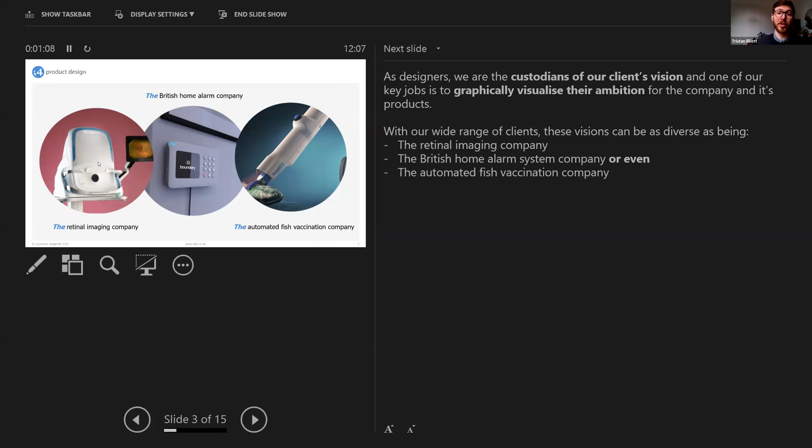One of the more bizarre examples of a customer's vision from a few years ago was to develop the world's first electrical stimulation device for weight loss. The company was a startup with two founders, a neuroscientist and a neurosurgeon, who had not previously developed a product before.

We became their turnkey development partner, and along with their preferred contract electronics manufacturer and our proposed injection molder, we were relied upon to give them the kind of costings that they would need for fundraising, which was quite a mixture of government, VC, private investment, and crowdfunding.

My reason for raising this particular example is because it epitomizes the competing interests that can sometimes be at play, such as ergonomic challenges, and for this product it was a one-size-fits-all headband. There was also the need to have a high-quality aesthetic, which points to really having a compact electronics design, and keeping both the project costs and the unit costs as low as possible, as this was a consumer electronics device in a competitive space.

Whether or not you opt to use your own in-house development team, if you have one, or those of an outsourced partner, without ensuring close integration of the design and engineering functions, you could find yourself in a situation where you have a design that is highly functional, simple enough to fabricate, but not really desirable. Or even worse, possibly the design is really desirable, but costly or perhaps impossible to manufacture.

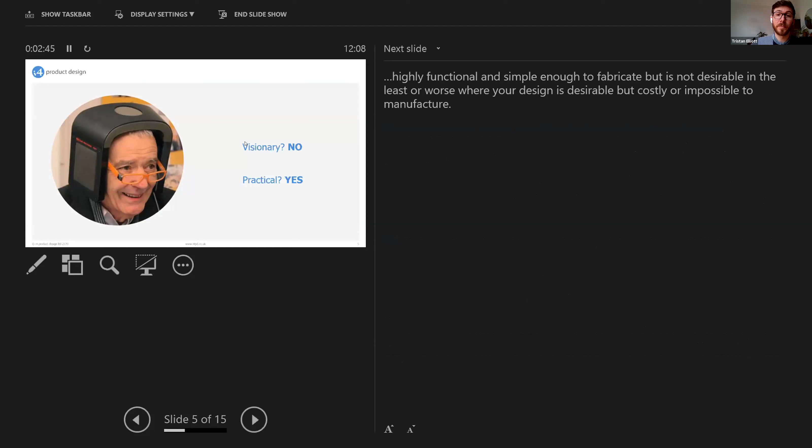Using an integrated and experienced design team, armed with your commercial targets and market insights, can deliver creative designs that you can be confident are rooted in the realms of practicality. This is what I like to call creative pragmatism.

Two of the key questions that we asked this client and every other client before setting off on the road to design for manufacture, or even starting the project, were: what is the development budget?

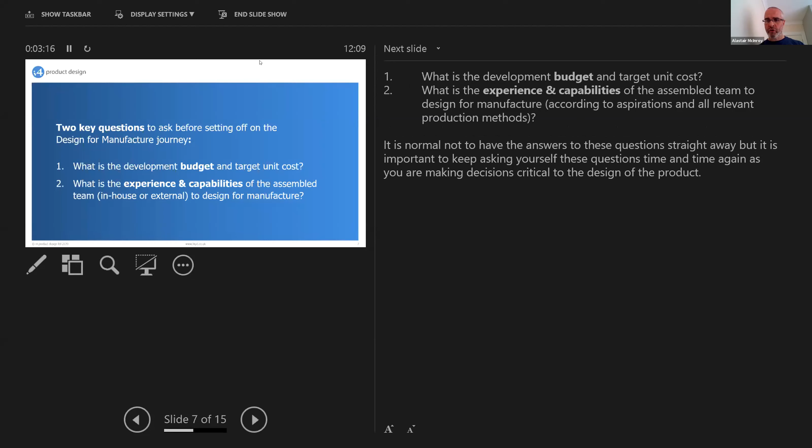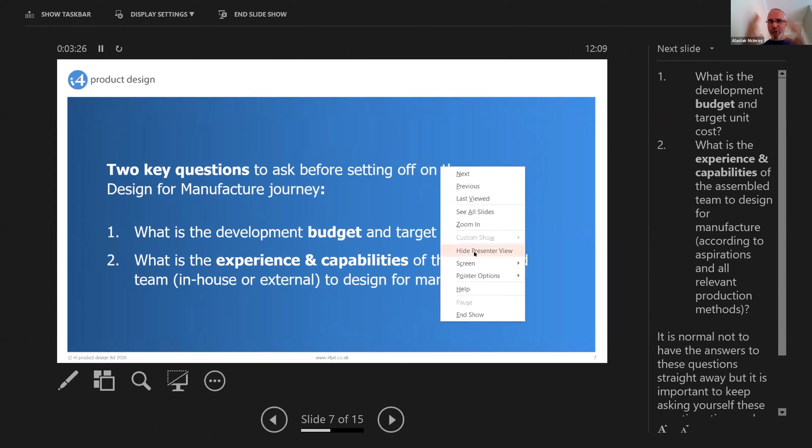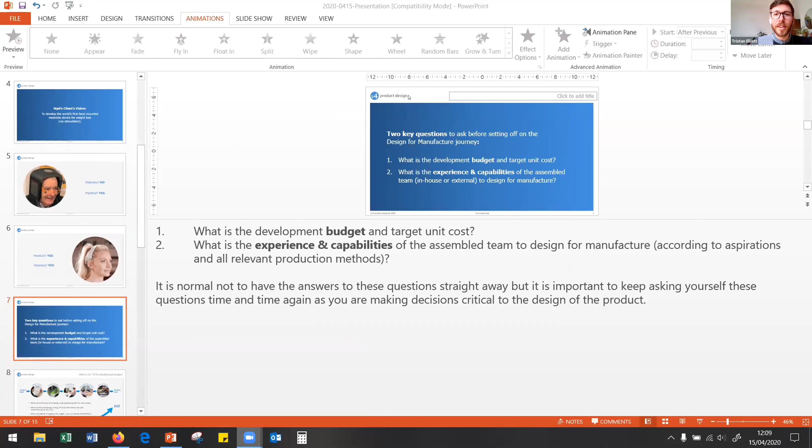Hi Tristan, sorry for the intrusion, but I am seeing your slides in edit mode. Are you? Yes. Okay, I think from the chat others may be seeing that as well, so we get the full splendor of your slideshow. Okay, no problem, let me see if I can rejig this for you all. Believe it or not, this was actually tested. Okay, how about that now? Good, perfect, sorry about that.

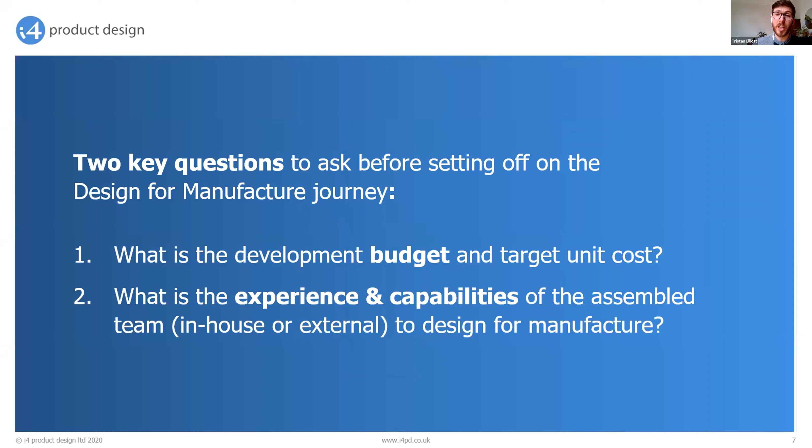So the two questions are: what is the development budget and target unit cost, and what is the experience and capabilities of the assembled team to design for manufacture according to aspirations and all the relevant production methods? It is not really normal to have the answers to all these questions straight away, but it is important to keep asking these questions time and time again as you make critical decisions for the design of the product.

At the top of the slide is the list of core phases a product will pass through from its birth to manufacture. It's crucial to be honest with yourself as to the true cost of development and budget accordingly, or you risk what I call zombifying your project.

This is where you've spent all your funds reaching the engineering phase, but your initial investment can't cover the cost of producing production tools, let alone your first minimum production quantity order. So prepare your cash flow projections accordingly and push for favorable payment terms from your partners, such as small upfront payments for each phase of design work, with the remainder payable on deliverables, once you're 100% happy with the quality and can sign off on it.

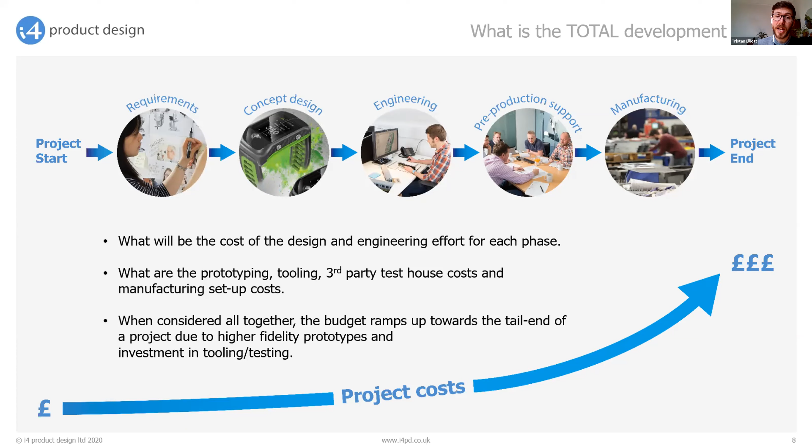Project costs do ramp up towards manufacture, as you begin to produce higher quality, higher fidelity prototypes, start to pay for third-party test house fees, and more often than not have to fork out 50% deposits for any tooling. It's also important to account for import duties when procuring prototypes or tools from overseas vendors, as this can be an unexpected addition of 20% to your costs.

If you're working with a design partner or manufacturer, make sure you're getting a quote that covers you from where you are on your journey through to gold standard production samples. Ensure they've included physical prototyping as an activity within the concept and detailed engineering phases, and make sure you know how much contingency is included in both the budget and timeline to account for iterations and learnings from these prototypes.

When briefing the consultancy, make sure you're clear on what you expect from them. For example, who is to produce the assembly drawings? Who is to undertake design refinements during production sampling? And who is to produce test jigs that may be required? Unless otherwise agreed, this is generally not something manufacturers throw in for free, and is a cost you'll have to bear, or the design consultants should quote for if you're not doing it yourself.

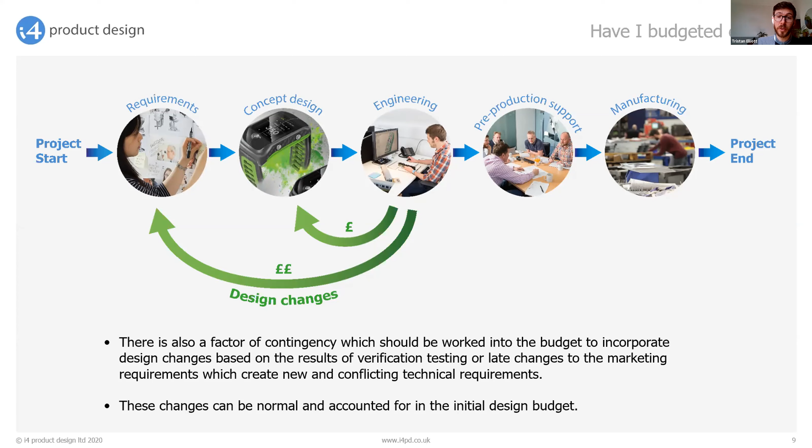One cost that you shouldn't have to factor in is large-scale design changes after an engineering phase, which is where your design should be technically frozen.

The main reason for a design change just prior to or after design freeze is due to inexperience, which can be compounded by not having internal reviews or not carrying out reviews with the contract manufacturer you've selected. This can happen as early as when you have some kind of design drawings or spec to show them.

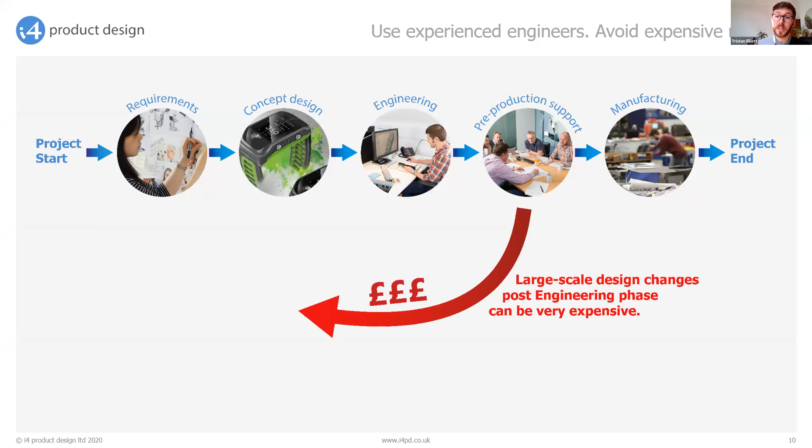It's rare to recover from these kinds of changes, as usually it means you incur the cost of redoing part or all of the engineering work entirely, and potentially scrapping an expensive production tool.

One of the most important pieces of information a designer can be fed is the target cost for a product—manufactured, assembled, boxed, and shipped. It's important to include all those factors. A target cost allows for practical concepts to be generated around part count, materials, processes, and off-the-shelf versus custom routes. By part count, that could include a decorative trim or trying to consolidate several parts into one, possibly contributing to strength requirements or conversely.

Your target unit cost can be worked out roughly by taking what you intend to be the retail price and deducting distribution costs and your desired margin, which accounts for your own costs and your profit aspirations.

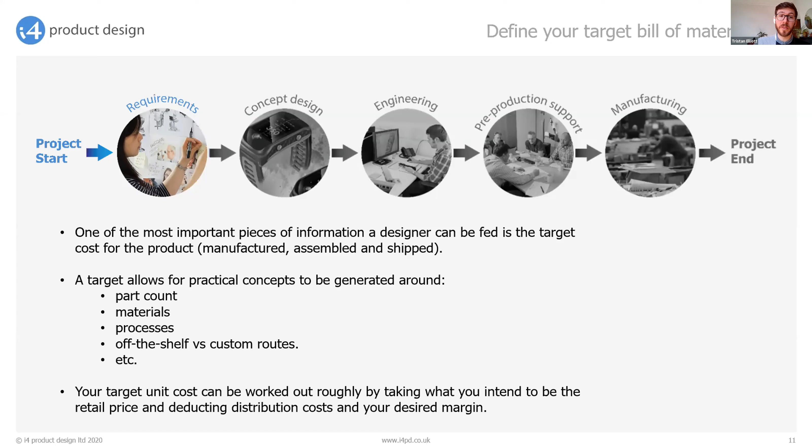It's not uncommon to use several different fabrication processes to produce the parts for one product. This means that to achieve your marketing and technical requirements, you should consider various tooling options and budgets associated with these processes and plan accordingly. It will mean your designers should be comfortable with both plastics and metal, and you'll likely have a large number of manufacturers in your supply chain, which either you or your consultants will need to manage.

At I4PD, our team have created a platform for estimating tooling and unit costs, so we can give our customers an early indication of tooling and unit cost for their NRE budget. Throughout the project, we refine this estimate as the design evolves and as we have more detailed discussions with contract manufacturers.

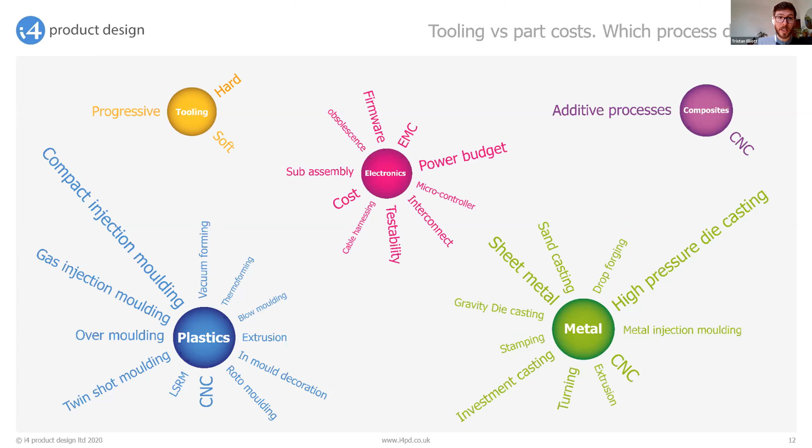It may be that there is no budget available for tooling and that all funds must be diverted into the design and engineering of either the first earliest testable product or the earliest sellable product. This could be a combination, for example, of sheet metal, which needs very little tooling investment, and additive or subtractive manufacturing, which needs none at all. The trade-off is that the unit cost will be far higher as a result of selecting these slower, lower volume manufacturing processes.

However, it could be a viable option as a means to an end, where you need to prove a concept either works or is capable of generating revenue for your investors or backers, before progressing the design to one that can actually earn you a decent margin.

High volume processes, two of which are shown here—low thousands to millions of units, like injection molding and die casting—will attract tooling costs that can ultimately result in parts that are a fraction of the cost. The same applies to electronics, where you might choose between an off-the-shelf Bluetooth low energy module or integrating your own chip solution.

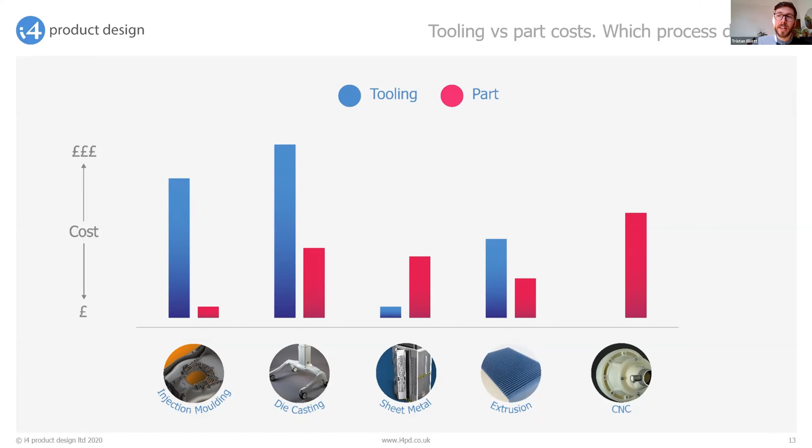You'll need to do a cost calculation to decide at what volumes it makes sense to design, test, and qualify your own solution, versus the additional cost of buying a pre-certified module. A recent study we undertook found the tipping point was around the 200,000 unit mark. These calculations should be done roughly at first, and then redone as you get better marketing projections.

So my two top tips for managing your budgets and avoiding common pitfalls: budget comprehensively for everything, including designing, prototyping, testing, tooling, and manufacturing setup costs, and include contingency—around 25% as a rule of thumb.

Build internally or partner with a team that has experience with the applicable manufacturing processes, to ensure the project runs efficiently and you avoid expensive and potentially catastrophic issues just as you thought you were nearing manufacture.

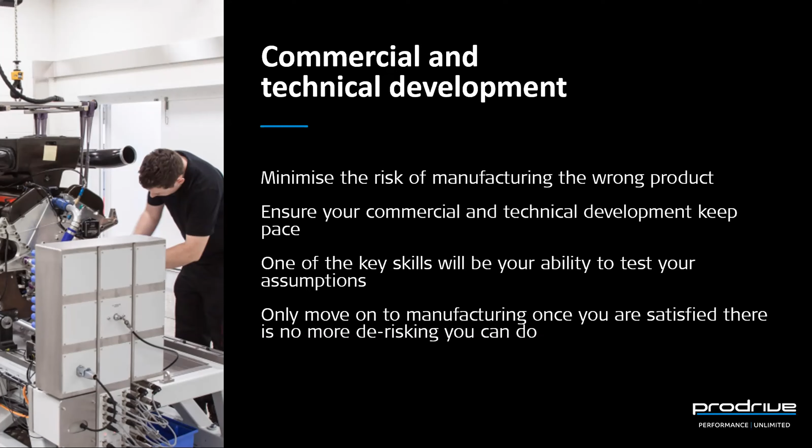One of your key skills will be your ability to test your assumptions. I'll cover some of this in the prototyping section, but prototyping is not only for technical purposes, it's very much also for testing your commercial assumptions. This testing of assumptions is key to de-risking before manufacturing. You're likely going to have to make a commitment, so do as much as you can to de-risk that point in time.

The importance of defining a scope. You might know it as a specification, but fundamentally what this does is capture the attributes and requirements of your product, based upon your understanding of the market, the target customers, and how your product will deliver value, everything you've done up until that point.

There are a couple of core reasons why you should do this exercise. It creates a level of focus to your development process, which is key. The development phase is costly, and you want to be as efficient as possible, and one way to do that is to tightly define your scope, because variance in your scope can ultimately be very costly in the long run. Secondly, it reduces the likelihood of unexpected surprises, because you're going through the whole process of thinking about all aspects of your product to reach a point where you can produce something your customers will value.

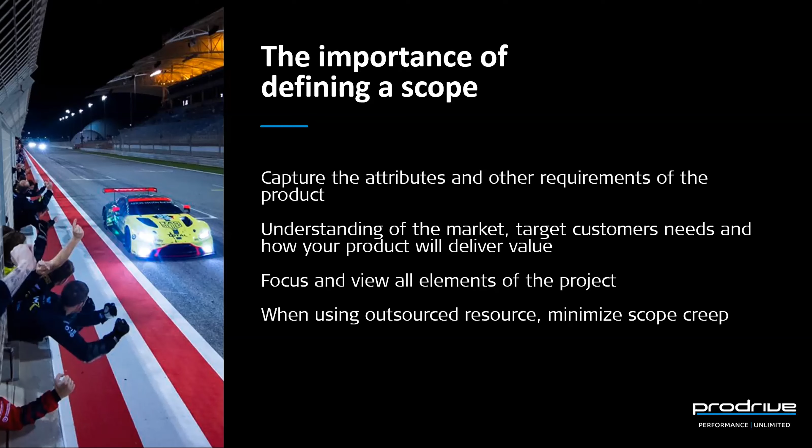Their focus was fundamentally about weight. Their product was designed for adults to use for commuting and leisure purposes, which gave them some of the parameters they were looking for. This focus allowed them to create a defined scope that they could take onto the different phases, which then defined the materials they had to use - in this case, the frame is manufactured from carbon fiber, which dictates a manufacturing process and all the knock-on supply chain effects and assembly. Without this level of scope, particularly as a startup, they wouldn't have had the opportunities without this kind of tight, laser focus on what they were targeting.

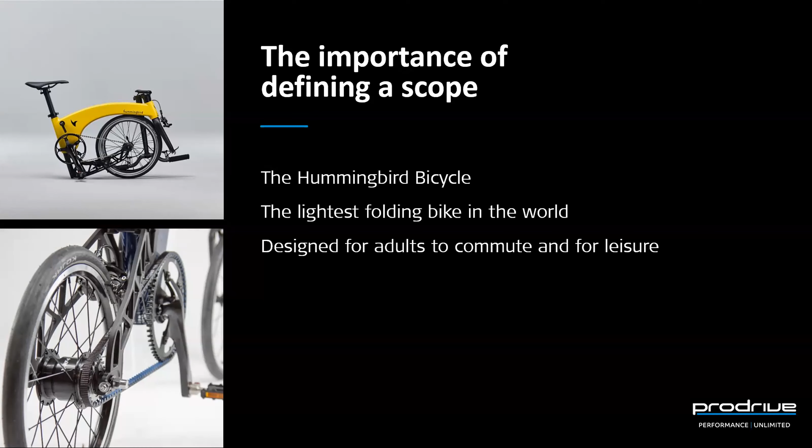Understand the ramifications of your actions. This is particularly important when using external resources, because it's likely that any change, particularly post engaging engineering or even manufacturing, will come at a cost, and is also likely to delay things. So minimize the amount of changes you make. Of course, I'm not saying don't make any changes, but understand that it will come at a cost.

Equally, be mindful that indecision can also be costly.

This might be the fact that you're delaying to do some more market research, and you may have a manufacturing slot lined up, which you may lose. But also be mindful of hidden costs - there's also an opportunity cost that you have to factor in. There may be a gap in the market or a commercial window you're trying to chase, and any delay may lose that opportunity. So one of the top things is to make sure you understand the processes that go into making your product, without that understanding you won't be able to make the sound decisions you need to make.

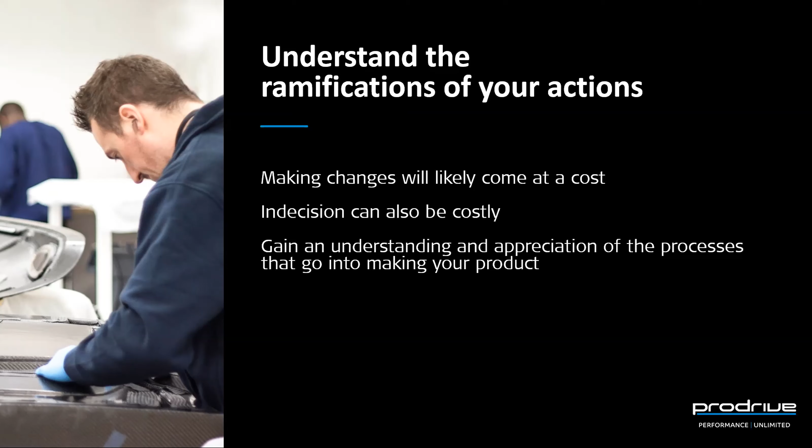Prototyping strategies. As I said earlier, this is really important to de-risk some of the commercial but also technical elements of the development phase. Understand what you're trying to prototype, what you're looking to test, because you're not prototyping for the sake of prototyping - you're prototyping to test some of these assumptions and to de-risk the whole process. So in order to establish an efficient prototyping strategy, make sure you look out for what you're trying to test.

In addition, question what has to be physically prototyped. There's often a bias for people who live in the world of physical products to immediately jump to making physical prototypes. There might be a lot of things you can do to prototype virtually - for example, you might be able to gain customer feedback by showing renders. Things like that will allow you to increase your iterations without significantly increasing costs. So you can gain a lot by doing things virtually. Again, look for tools you can use to reduce cost and increase certainty.

So look for other tools you can use to prototype things at significantly reduced cost and increased speed. But also be mindful that you might not be able to prototype every aspect of your product - for example, you might not be able to test the exact materials. If it's an injection molded product, you might not be able to test realistic materials or full types of function. You may have to do several different prototypes, and only the final product will have all the features in one. Just be mindful that at some point you will have to make a commitment which you might not be able to fully test.

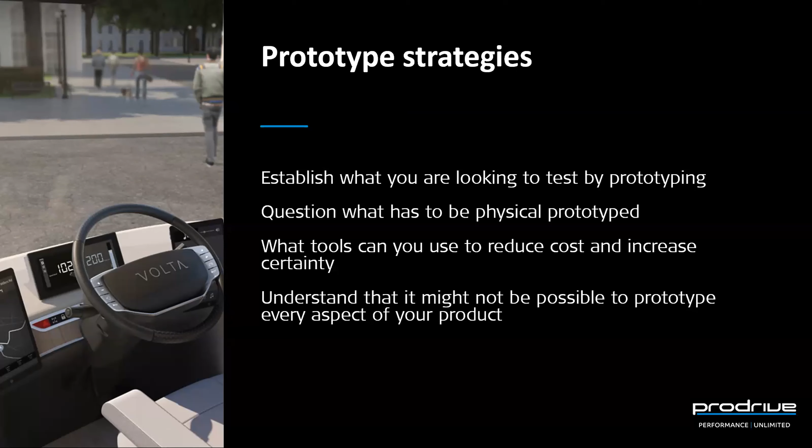So just to cap off, these are the 4 different aspects of managing costs: learn and appreciate the processes involved; make sure your technical and commercial development keep pace with each other; define a scope that is focused and built upon the research you've done; and test your assumptions via prototyping as much as possible to help de-risk before manufacture.

Today I'll be focusing on the importance of thinking about the cost and feasibility of manufacturing your product, and the importance of thinking about it as early as possible in the product development journey. I'll be highlighting a few key design considerations that you should really be incorporating to try and keep these costs as reasonable as possible. There is a bit of overlap with Tristan and David's presentations, but it's all good to give you a holistic view of everything that goes on in this journey.

So this model here, basically new product development can be seen through this model. It's called the 3 lenses of innovation, but it basically aims to demonstrate that to have a successful commercial product, people have to want it, so it's desirable. You can actually do it, it's feasible, and it makes financial sense to do so, it's viable. So basically, if you can get these all aligned perfectly, you're in what's referred to as the innovation sweet spot. You can apply this model to any area of your business, but we are specifically looking at the manufacturing of a new product.

In this case, most early stage growth companies can create a technically viable prototype, but do then struggle with engineering challenges relating to cost effectiveness, implementation, and market viability. So in other words, it's cool design, people like it, but is it actually doable? Can we do it? Maybe not. Let's have a look at that.

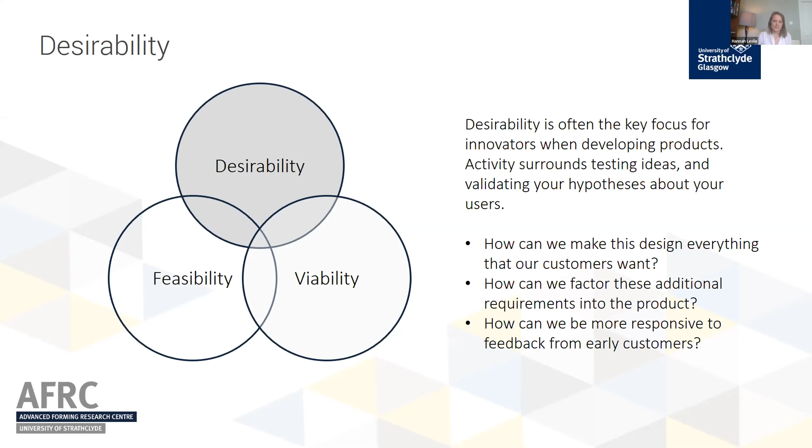But as we're doing all of this activity, as I mentioned, we really should be keeping an eye on both the feasibility and the cost of this product. So, can it be manufactured? Can it be manufactured efficiently? And can it be manufactured at a cost that is viable for the business?

Or do we need to have a look at the value proposition of the product? For example, you could introduce a product at an unrealistically high price point due to increased production costs, or you could unintentionally design a product that is too complex to manufacture at scale, at a reasonable cost, or you could ultimately eat into your margins by not fully understanding all the costs associated with your product. For example, some of the hidden costs that David just discussed.

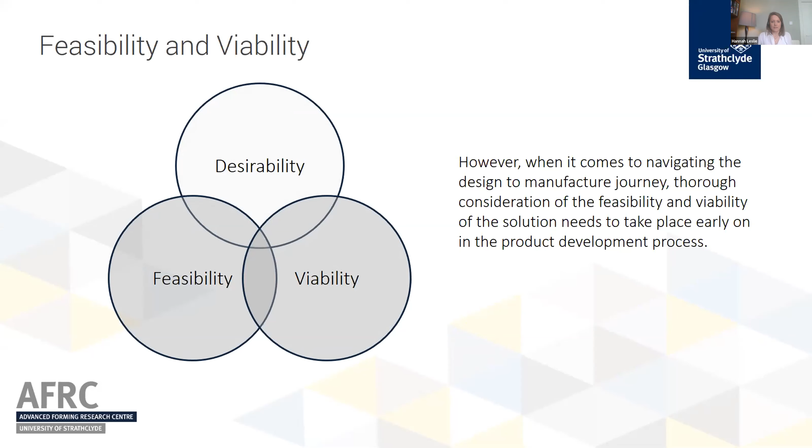So particularly looking at viability, when we're looking at viability, we're looking at things such as, does this product respond to market trends and drivers? Is there a large enough market for this product? What is the value of this market? How much of that market is actually accessible to you as a company?

And if we know that, and we know this information and we're comfortable with that, the follow-on questions will be: is this target market actually going to accept our product based on the standards and codes that they conform to? At the AFRC, for example, we work with quite a lot of heavily regulated industries such as aerospace, oil and gas, or medical devices. You really need to understand the codes and standards that apply there. Otherwise, you might have a wonderful product, but it's just not going to be accepted into industry.

And oftentimes this might actually dictate the method of manufacture that you need to use to some extent. So for example, at the moment, additively manufactured parts aren't yet widely qualified for use in oil and gas, especially not for critical applications. That would be something that you would need to know early on before you started trying to make a product for application in oil and gas.

So finally, once you have an idea of what manufacturing and production costs might look like, does the value proposition for this product make sense based on those target costs and volumes that you want to achieve? It might be that you need to revisit your positioning strategy for endpoint pricing, or look at other areas in the value stream where costs can be salvaged.

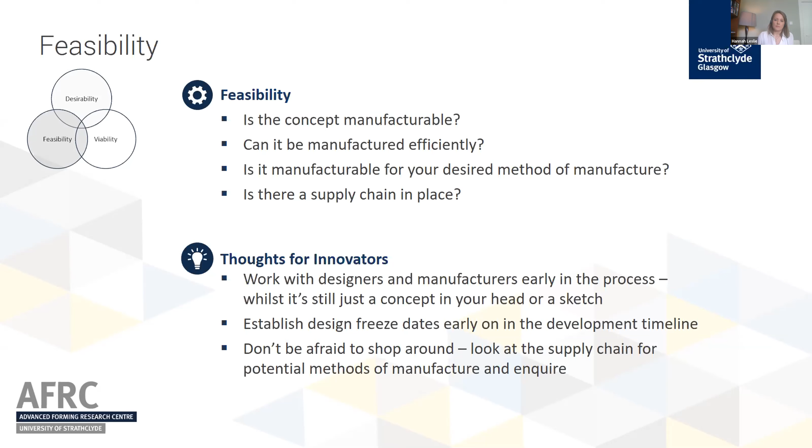One of the first things to consider is minimizing the part count of your product as much as possible. Generally, the fewer components, the less quality issues in the supply chain, less parts to maintain, and faster assembly. So try and look for ways that you can combine functions in your design and reduce the final number of parts for assembly.

In line with this, where possible, using standard off-the-shelf parts as opposed to bespoke parts can save quite a lot of money down the line. It could be anything such as fasteners, caps, bungs, fittings, connectors, inserts, etc. These parts will have already been invested in terms of capital equipment, process development, testing, validation, and so on, so you don't have to do that part yourself. It can result in some quite significant cost savings for you.

It is worth highlighting that there is a risk with that, in that you're relying on an external partner for the production of some of the parts of your product. So you'd have to be aware that might leave you open to risk if it's not accounted for. But overall, it's quite a beneficial way to leverage costs for your design.

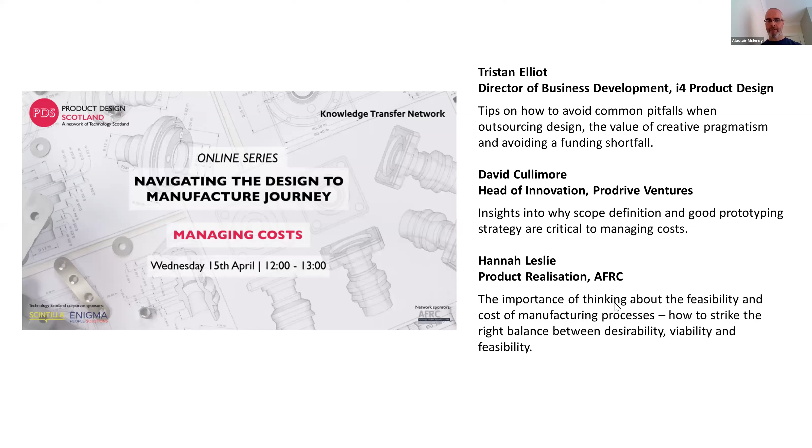I have seen a number of questions coming in, and what I've also noticed is that when I'm sharing my screen, I can't see them. So that's a slight issue. Hang on a second, there must be some way around this. I found them - panic not, we have them back. Okay, that's good. So yes, there's been a steady stream of questions coming in. Thank you all for those who have put those in already.